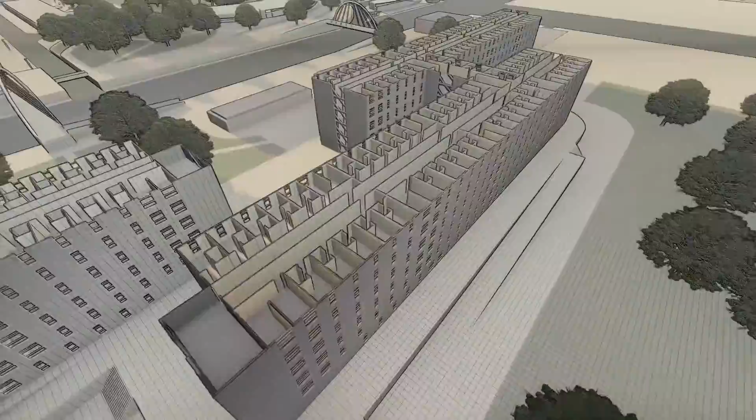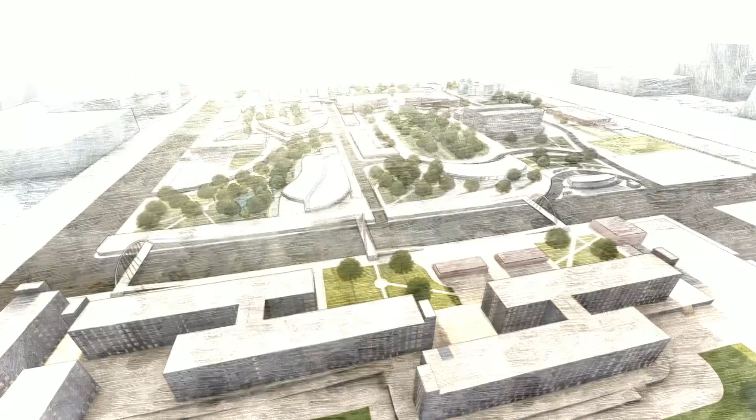Manila Metropolitan University is Eden's answer to this problem. Eden is a firm that specialises in the design and development of educational institutions. It prides itself on providing solutions that are inclusive and develop the economy of the country Eden is working with. The biggest selling point for the Manila Metropolitan University project was Eden's identification of all stakeholders and understanding of their needs and wants for the project as a whole, while upholding Eden's mission to deliver the most logical, cohesive solutions in the management and construction of educational institutions.

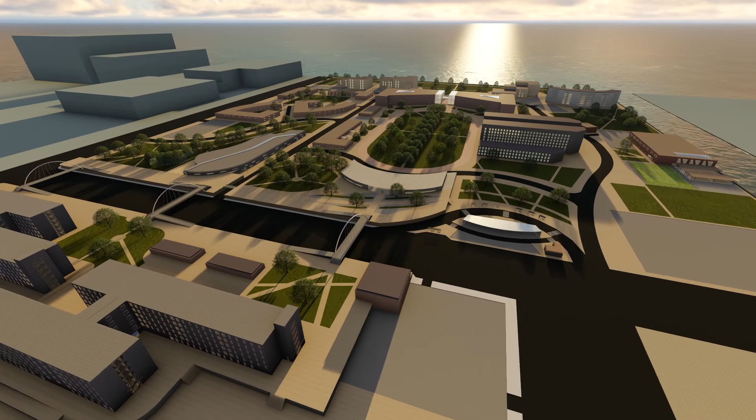Let us present to you the team who will deliver this project. Stephen Green-Price, who served as Project Manager for Eden. Tom Gow-Smith, Eden's Secretary and Finance Manager. James Briggs, who served as Structural Engineer for the University Development. Andrew Troy, in charge of Civil and Infrastructure Works. Sam Folkes, responsible for Quality Assurance and Change Control. Richard Milton, Eden's Mechanical and Systems Engineer. And Dan Williams, Sustainability Manager and Health and Safety Officer.

Together, Eden brings you Manila Metropolitan University.

The proposed site for Manila Metropolitan University, or MMU, is located in the heart of the Philippines' capital. The development location was chosen by Eden due to its proximity to nearby transport modes, such as Ninoy Aquino Airport, numerous bus stations, as well as mainline train stations. The site is located on land reclaimed by an ongoing national government scheme, and Eden have proposed approximately 0.36 kilometres squared of it for the MMU campus development.

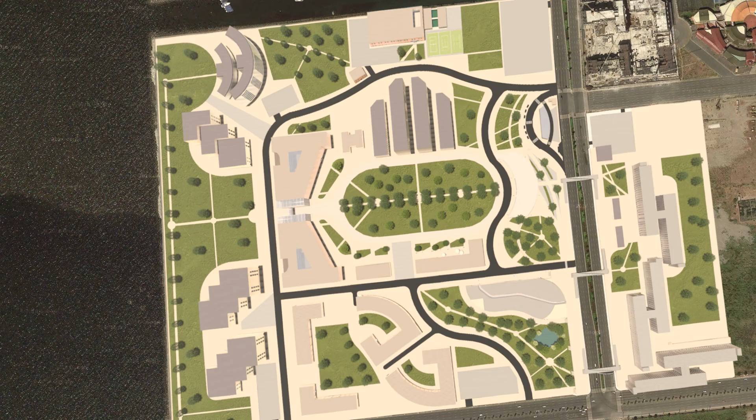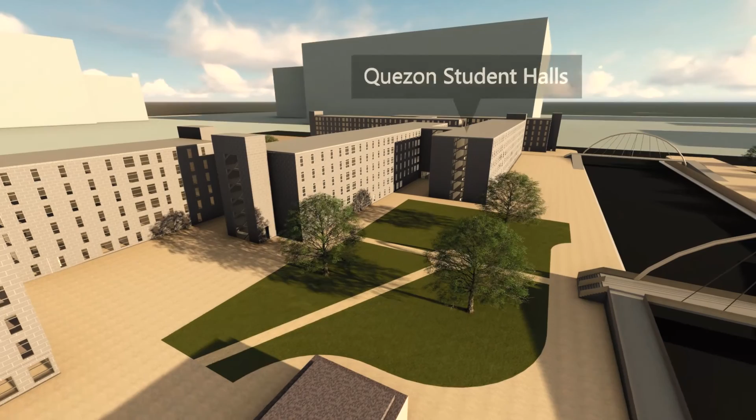Student accommodation is an important part of any university campus, with the Quezon student halls having capacity for approximately 1,000 students. These halls provide ensuite rooms, sharing communal areas, and standalone studio flats.

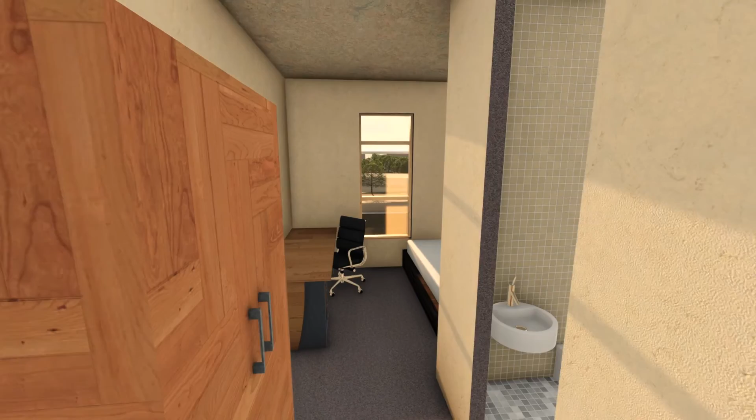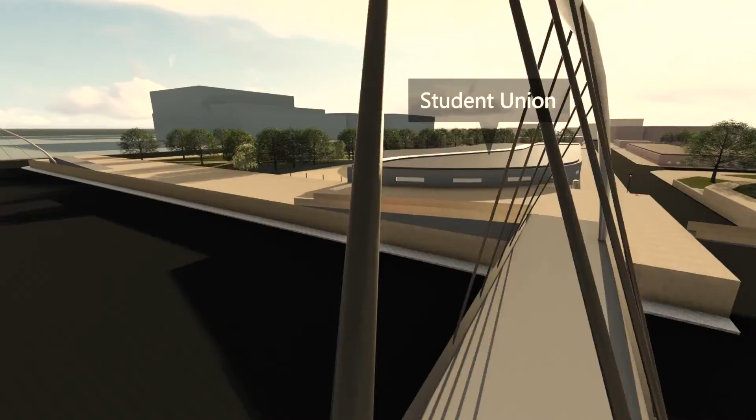3 Eurocode designed tied arch bridges allow safe and easy access for students to the campus site. One leads to MMU Student Union, which has a nightclub and a bar, as well as student facilities such as a careers hub and a hive.

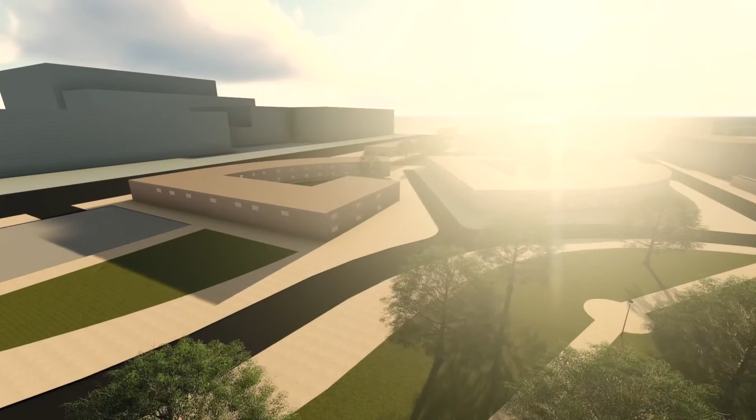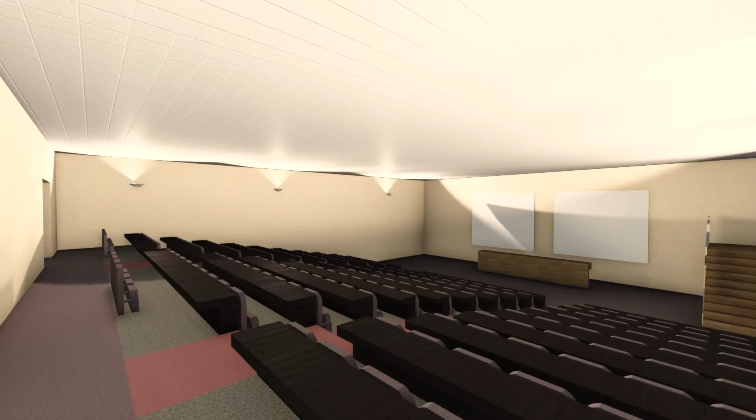Walking through Laguna Park leads to the Manila Engineering and Technology buildings. These buildings were Eden's primary focus on the project, to help alleviate the undersubscription of students in these fields by providing top-class facilities and closely adhering to BREEAM standards. Several key features have been implemented to these buildings, such as heavy laboratories, teaching rooms, IT suites and lecture theatre spaces.

The Bonifacio Lecture Theatres contains lecturing facilities and classrooms for other degree types.

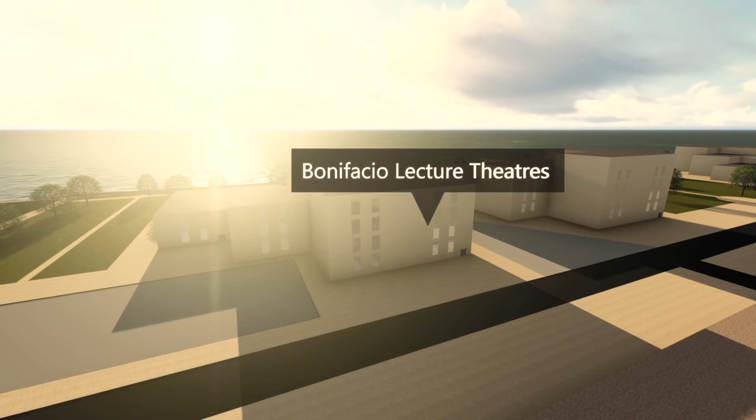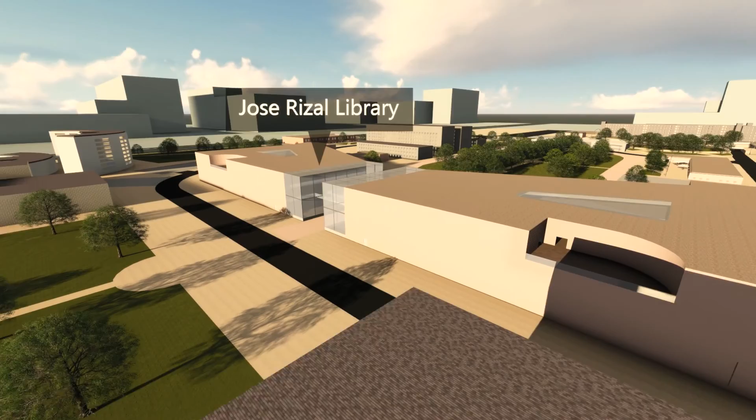By far the largest buildings on campus, the Jose Rizal Library is open to students, staff and members of the public. The 3 floors host a wide range of books and facilities. 2 atriums fitted with Pilkington anti-glare glass allow light to flood in, with a sky bridge connecting the 2 buildings.

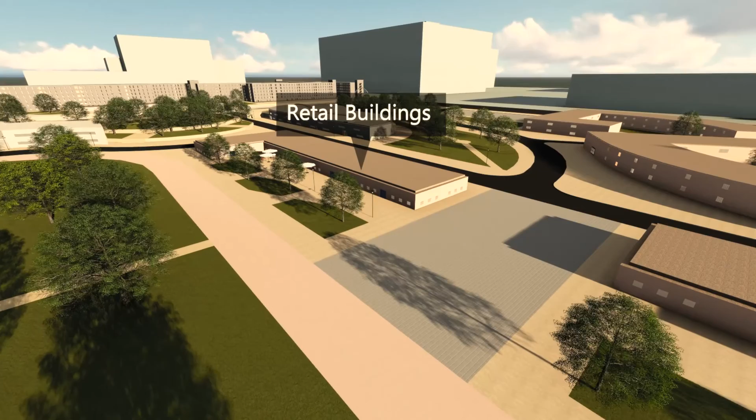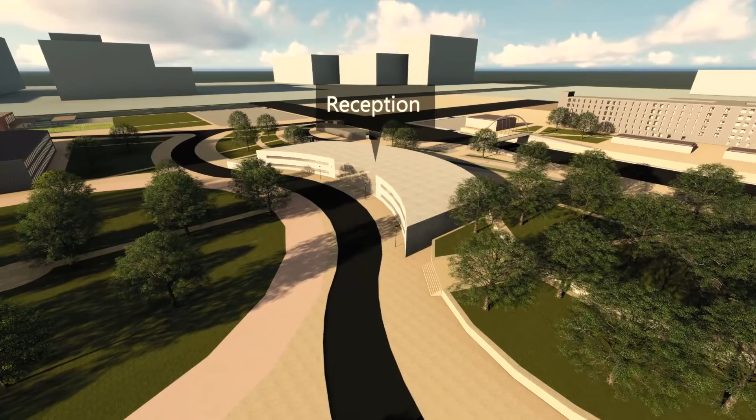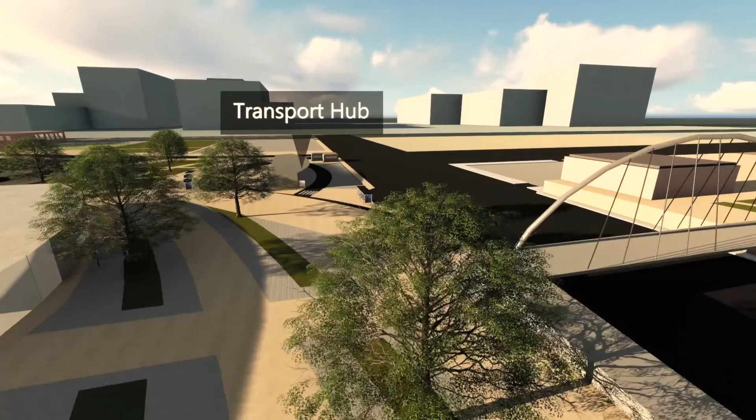Across MMU's Central Park, called the Oval, lies MMU's retail facilities. These are dotted around the campus to provide students with access to amenities such as a supermarket, banks and post offices. The reception is MMU's first port of call for new students and acts as the security and systems centres for the campus. It is located adjacent to the transport hub, which allows quick, safe and reliable transport between the major train stations, bus stations and airport. There is capacity for jeepney, bus and coach pick-up and drop-offs.

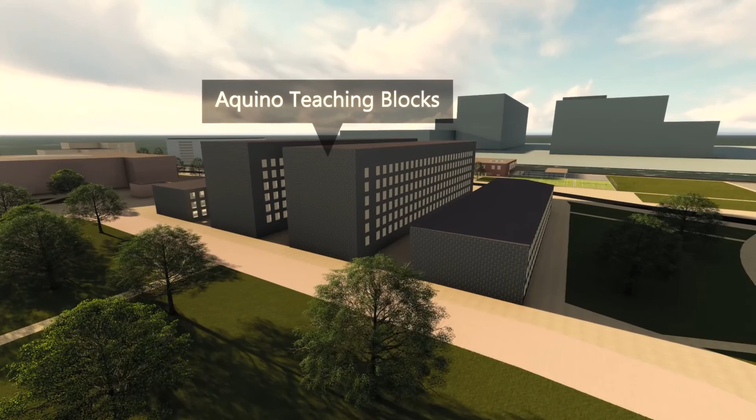These tall structures are the Aquino buildings, which have lecture theatre spaces at the base of each building, as well as teaching rooms and IT suites to supplement all degree types at MMU.

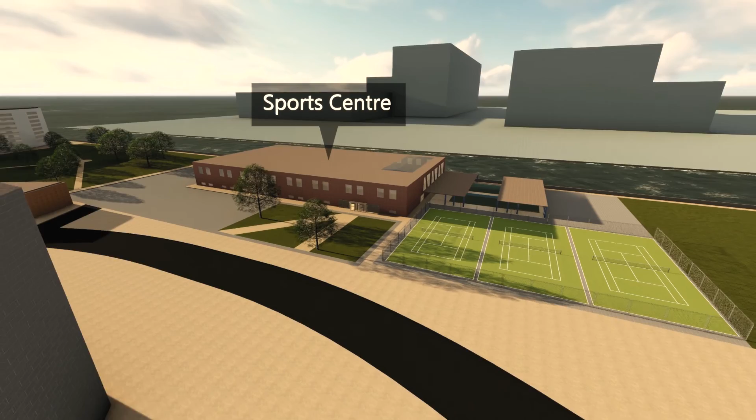A sports centre has been designed with indoor and outdoor swimming pools, an indoor basketball court and outdoor tennis courts, as well as gyms, cycling facilities and changing rooms.

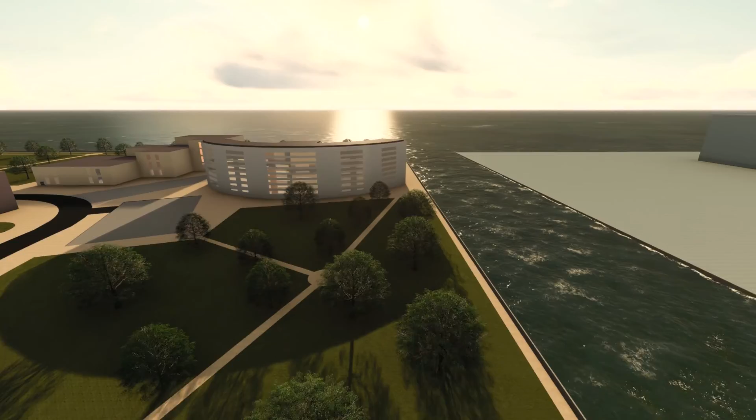The Legaspi student halls contain more expensive room types due to its location and proximity to the campus. The final design scheme is the campus itself, of which logical and holistic design has been achieved to bring all elements together to create one united university.

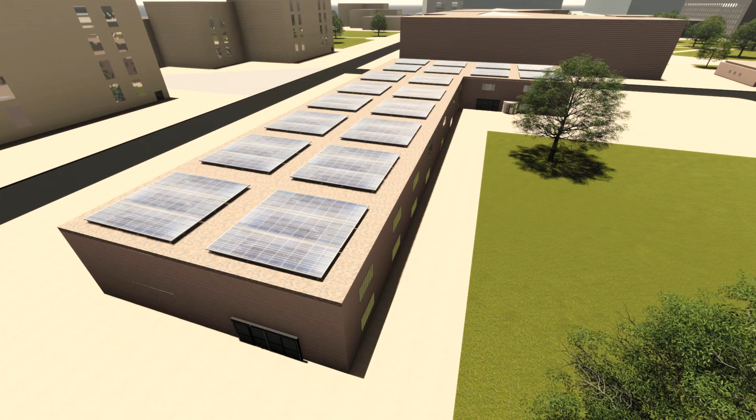Eden have designed fitted solar panels to all flat roof buildings on campus. The Manila Engineering Building generates a total of 34.5% of its energy output. All of the systems, including the renewable energy systems mentioned, were designed to meet British and EU standards. In each case, quality, efficiency and cost were at the forefront of our thinking.

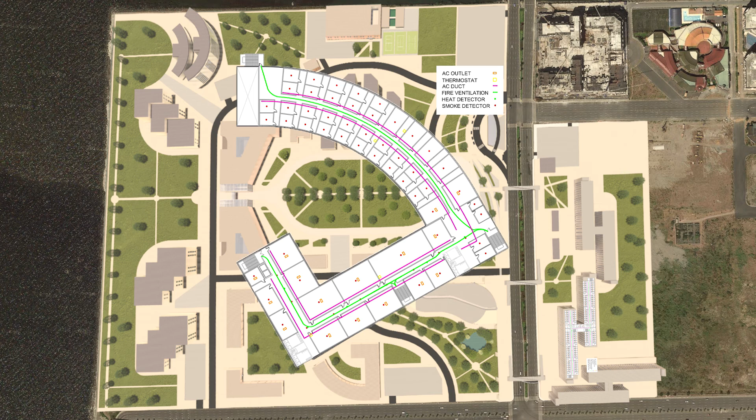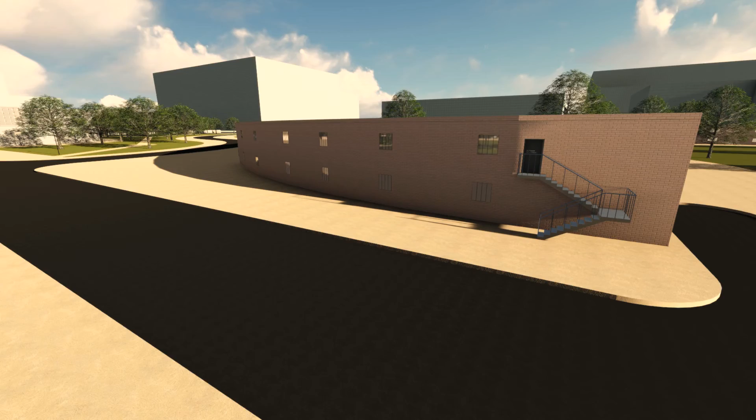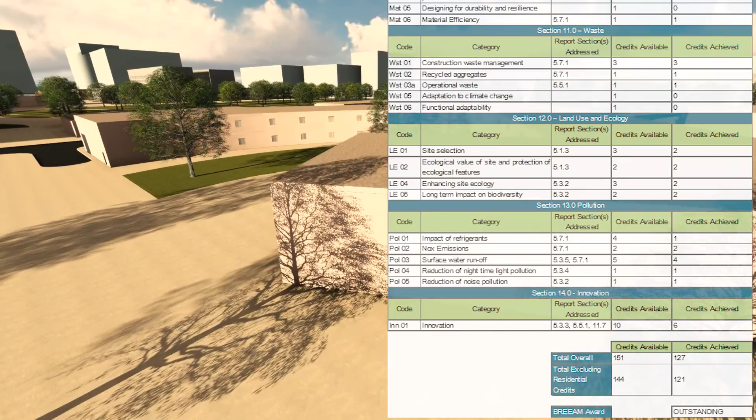All of the systems are fully integrated with each other, reporting to a central systems management hub within the main reception. We believe that the design of the MMU systems encapsulates our focus on the environment and putting the consumer first. This is in keeping with Eden's commitment to recording each BREEAM credit captured throughout the MMU design process. Every credit was carefully assessed to see if it was feasible for the university. Measures and calculations were taken to ensure an outstanding score for the development, helping it to adhere to BREEAM's sustainable design principles for sustainable construction and well-being.

This would make Manila Metropolitan University the only educational institution outside of the UK to achieve an excellent rating, let alone an outstanding rating, allowing the university to be at the forefront of sustainable institution design.

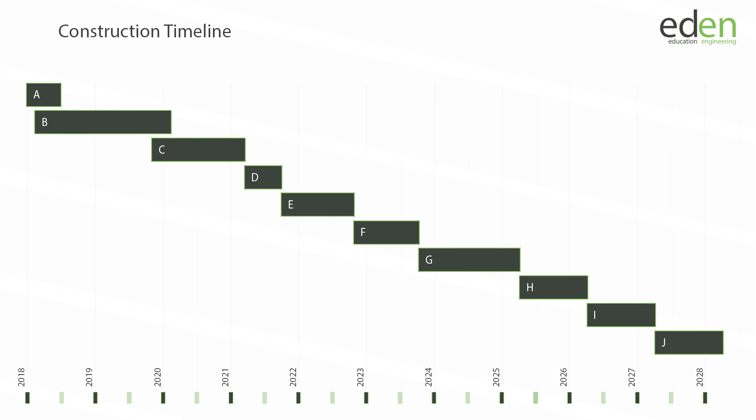The entire MMU project has been broken down into 6 phases, from pre-design through to construction. The estimated timescale of the full project is 12 years. The construction phase has been broken down into a further 10 phases from A to J. These 10 phases will take a total of 11 years. Eden's MMU project Gantt chart shows that the construction phase will start at the end of 2017 and finish in mid-2028.

Phase A will consist of the construction of the seawall at the west of the site and the retaining wall to the east of the site, adjacent to the road. Phase B will involve the construction of the Student Union and the Manila Science and Engineering blocks. Phase C sees the construction of the Manila student halls and pedestrian bridges to enable the university to start generating student revenue.

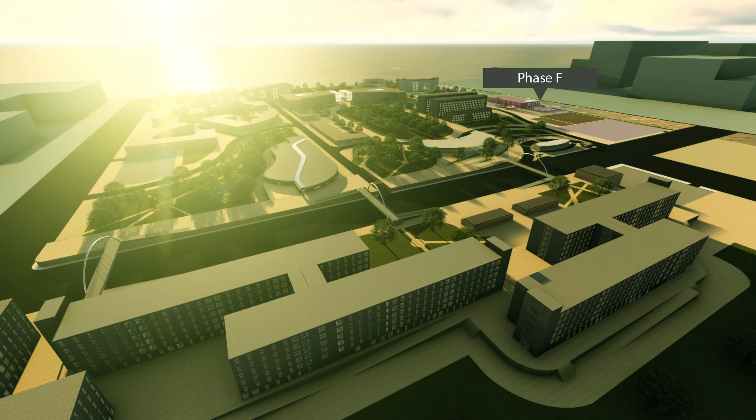Phase D will see the transport hub built to provide transport solutions to and from MMU. Phase E begins the construction of the main reception building. Phase F involves the construction of the sports centre. Construction of the Jose Rizal Library will then follow for Phase G, with the nearby Aquino buildings built in the following Phase H. Phase I will involve the build of the Legaspi student halls. Finally, the construction ends at Phase J with the construction of the Bonifacio lecture theatres.

Throughout the construction phases, Eden will use building contractors, who in turn will employ subcontractors and suppliers. For the principal contractor, an NEC3 framework contract will be used, as the project is long-term and it's likely changes will be made to design as phases develop.

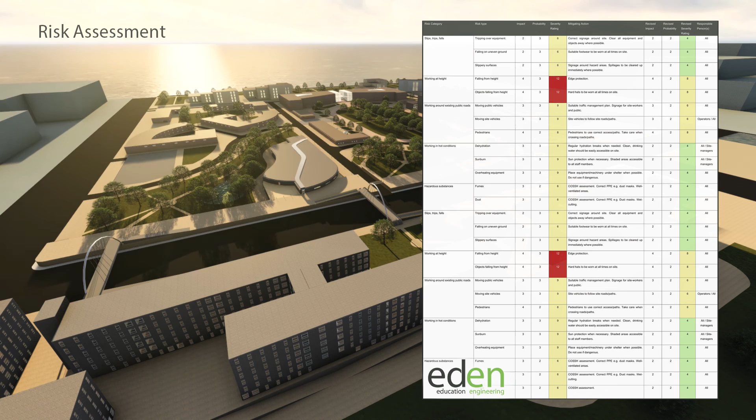Risk management and mitigation is an important facet in the design of MMU through all phases. Hazards to both the running of the Eden team and to the construction process itself were assessed with appropriate mitigating actions implemented. A SWOT analysis has been carried out to establish the key areas that Eden is likely to excel in and the areas that Eden lacks in experience compared to its competitors.

The main strength is our range of engineering knowledge, covering various disciplines including civil, coastal and mechanical engineering. Conversely, weaknesses include a lack of large-scale project experience, with Eden being a relatively unestablished company brand. The main opportunities identified by Eden are the national government's investment focus on education in the upcoming decades, as well as the lack of competitors specialising in institution design. Lastly, the biggest threat is losing contracts to larger, more established engineering consultants.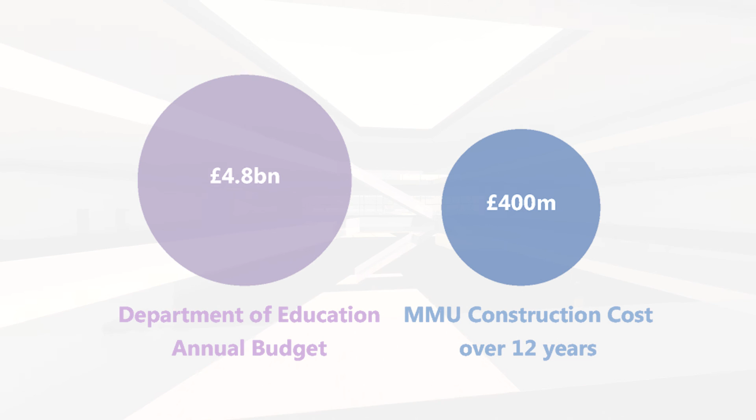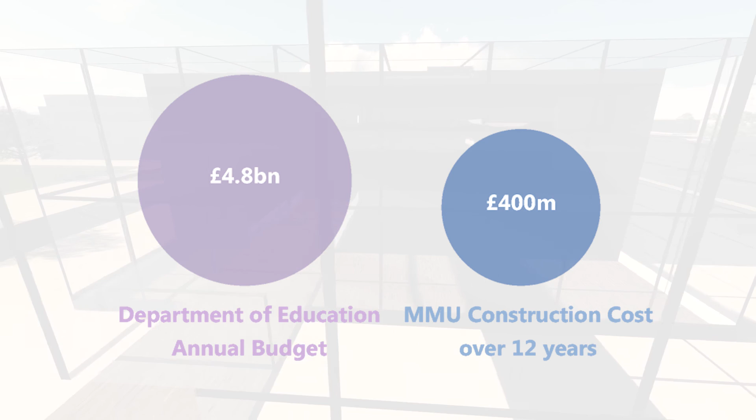To produce a cost estimate for the MMU project, the SPONS Architect and Builders book was used, alongside case study costs from similar projects. The total cost of the project, including groundworks, labour and fitting out, is estimated at around £400 million. The cost of the project will mostly be funded by the Department of Education in the Philippines government and supplemented by the revenue stream from tuition fees and accommodation rental.

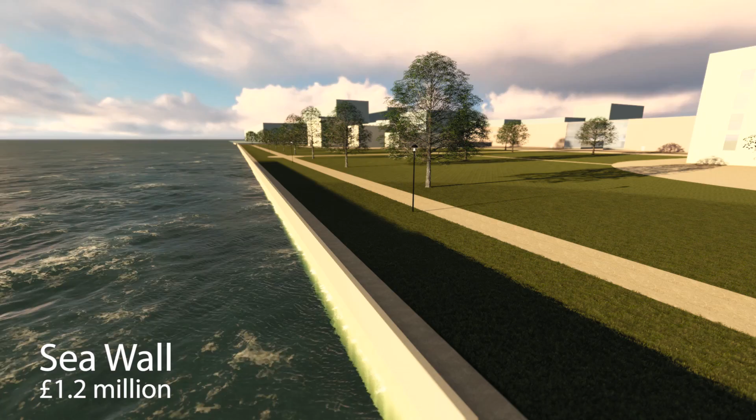The simplest way to go about costing a project of this size was to break it down into individual buildings and then estimate the total project cost and also the cost of each construction phase. The seawall, which is designed to protect the site from any flood event, is estimated at £1.2 million. The construction cost of the Manila Engineering Technology blocks, the Aquino teaching buildings and the Bonifacio lecture theatres is estimated at £30, £20 and £26 million respectively.

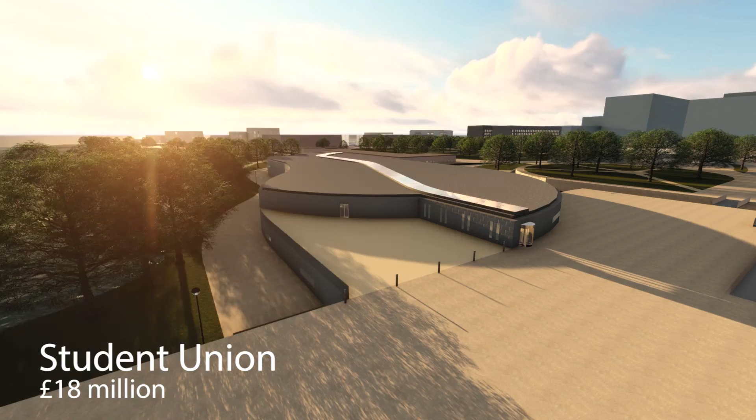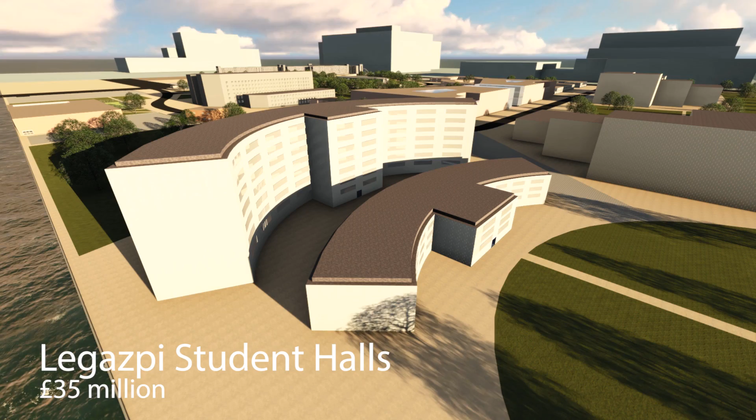The campus's state-of-the-art student union has been estimated at £18 million. The cost of construction for the standard Quezon buildings is estimated at £80.5 million for all 3 blocks. For the premium Legazpi buildings, the cost is £35 million for 2 buildings. The transport hub will cost approximately £3 million to construct. The reception building, which will act as the main entrance to the university, is estimated to cost £6 million.

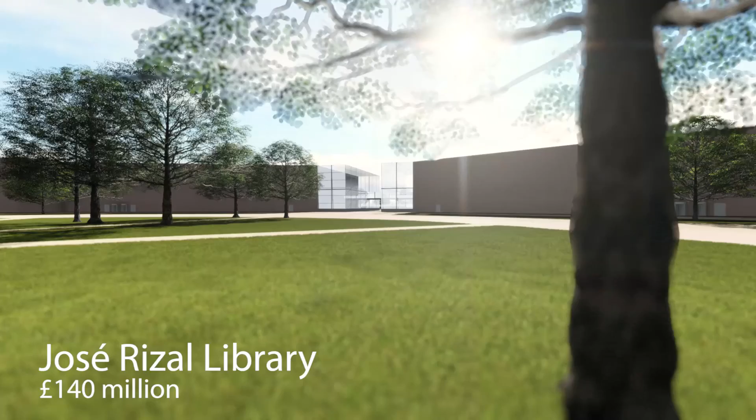The campus shops will be constructed at the same time as the reception building and will cost a further £4 million. The sports and medical facilities will be built at the same time. The cost of the sports centre is estimated at £6.6 million and the medical centre £1.8 million. Finally, the library, one of the largest buildings on campus and therefore one of the most costly, is estimated to cost around £140 million.

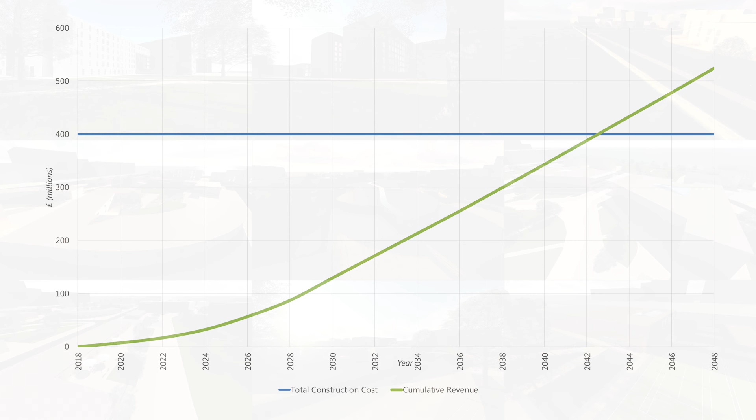Eden have used current estimates for Filipino university tuition fees and student hall prices to calculate a payback projection. As it stands, the MMU development is forecasted to repay its overall cost after 12 years of completion of the project. Eden strongly feels that the Department of Education's investment into MMU is well placed, with a payback time of 12 years.

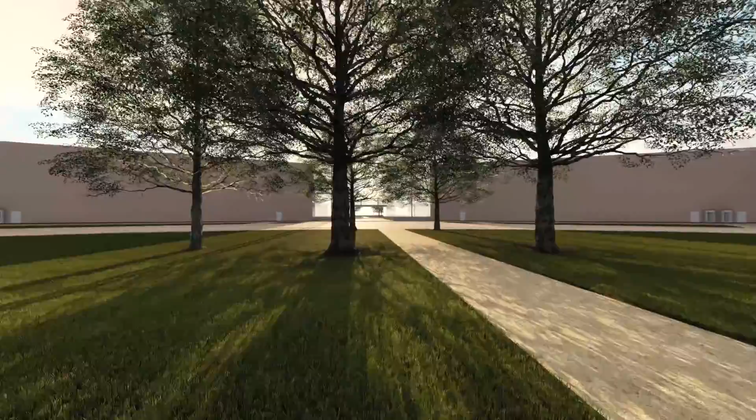The achievement of an outstanding BREEAM accreditation allows MMU to create tremors in the university market, appealing to prospective students globally to a sustainable, well-designed campus. Not only this, but Eden have designed MMU to support the economic growth of the Philippines by providing a high-class educational institution in the heart of metropolitan Manila.

Teaching buildings, student halls, and all amenities that students and staff will need have been designed to intertwine with the campus itself, providing a safe and holistic university for student learning and development. Let's study at Manila Metropolitan University.